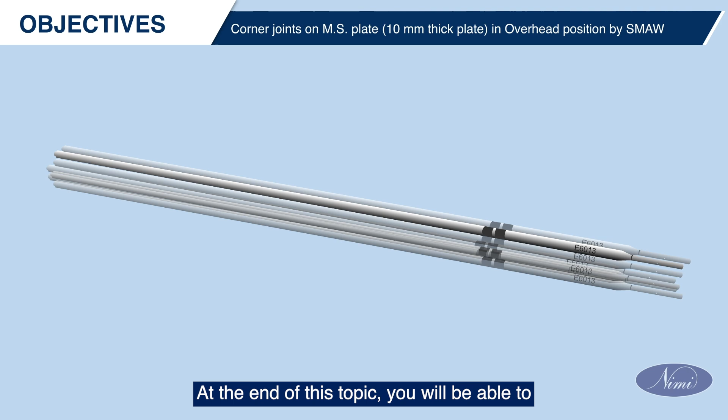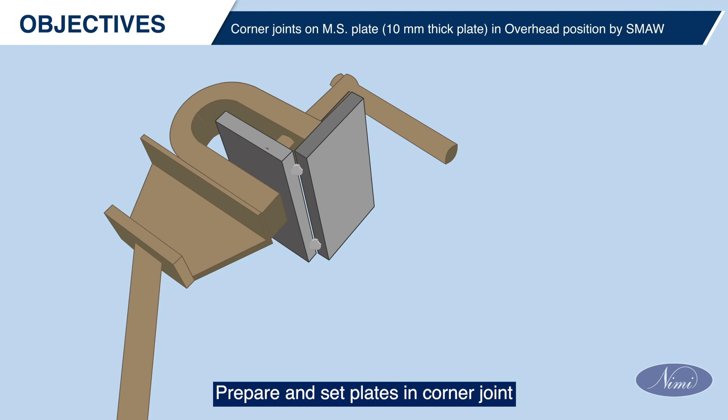Objectives: at the end of this topic, you will be able to select appropriate electrodes for tack welding and welding process, tack weld, prepare and set plates in corner joint in overhead position, and visually inspect the weldments.

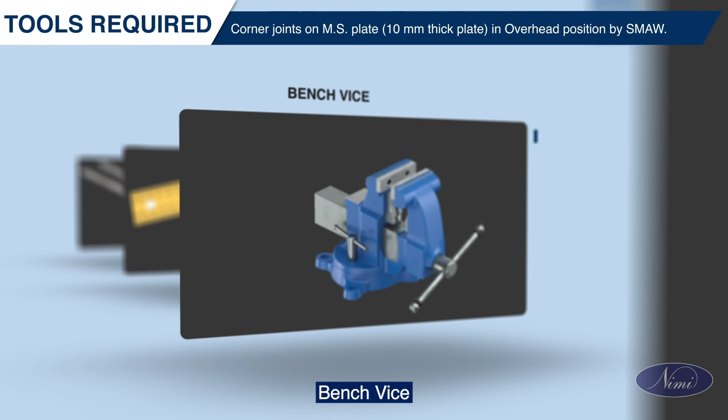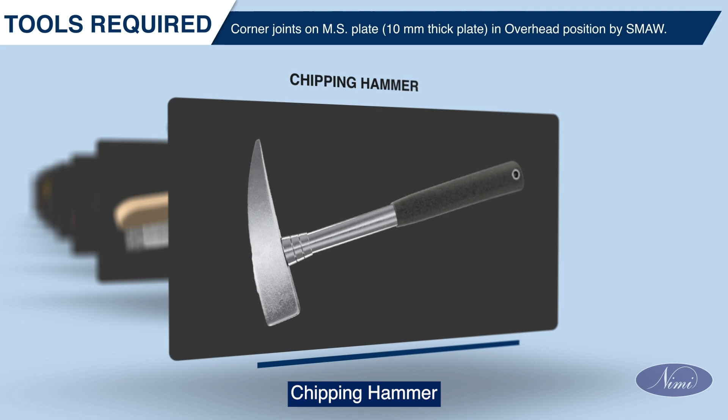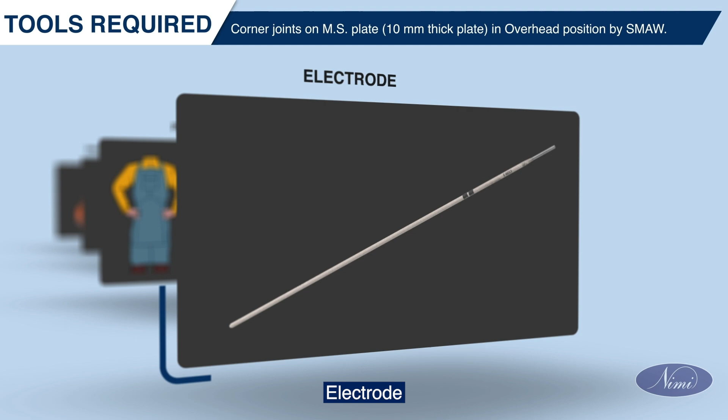Now let us look at the tools required for corner joint on a 10 mm thick MS plate in overhead position by SMAW process: steel rule, scriber, prick punch, ball peen hammer, flat file, bench vise, tri-square, tongs, chipping hammer, steel wire brush, electrode cable and earth cable, electrode holder, electrode, personal protective equipment, SMAW welding plant machine and their setup accessories, C-clamp.

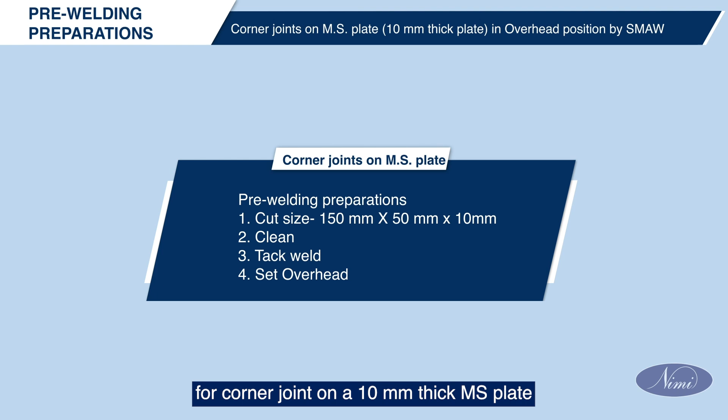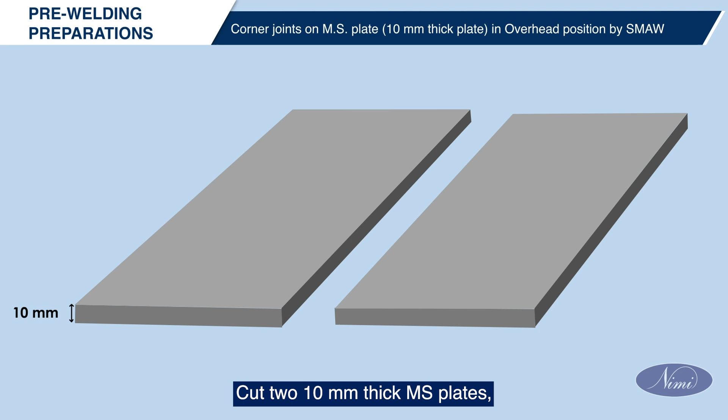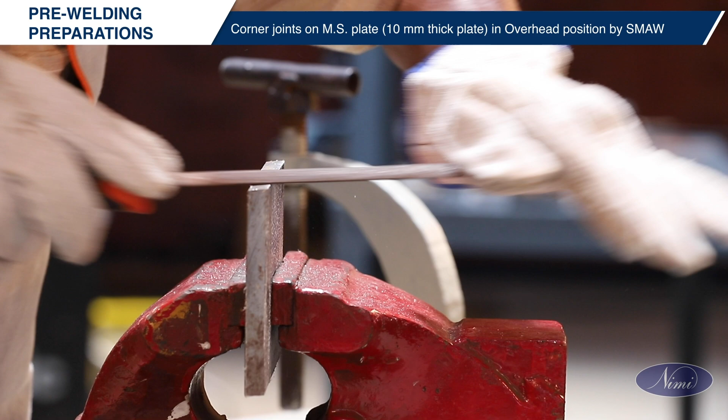Now let us look at the pre-welding preparations for corner joint on a 10 mm thick MS plate in overhead position by SMAW process. Use personal protective equipment for safety purposes. Cut two 10 mm thick MS plates, 150 mm length by 50 mm width flat. Clean the surface and edges of the flat to be welded. Set the sheets in the form of a corner joint on the welding table. Set the pieces as corner joint with 2.5 mm root gap.

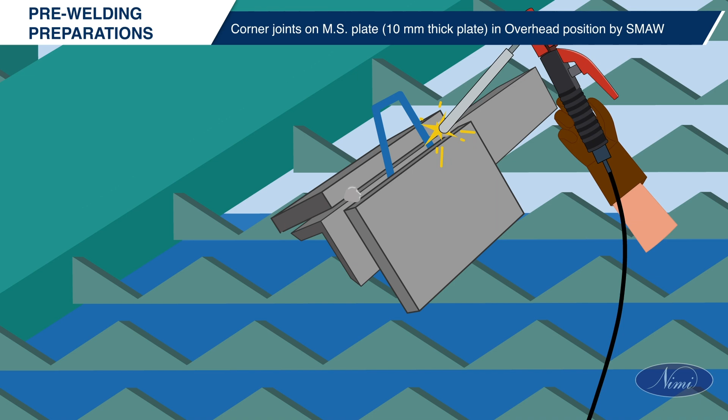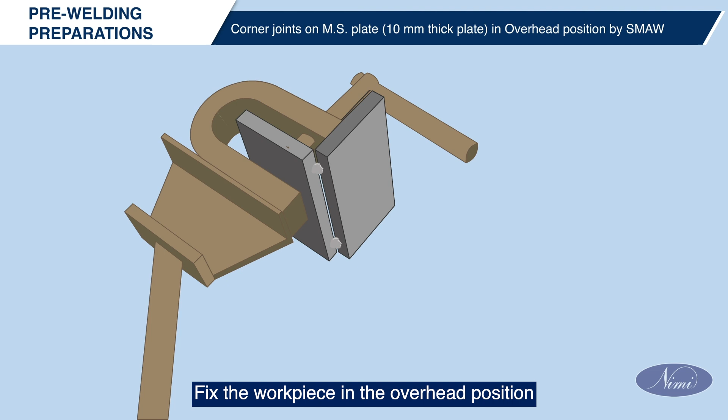Use a light welding cable to reduce the load on your arms. Fix the workpiece in the overhead position and adjust it to a suitable height.

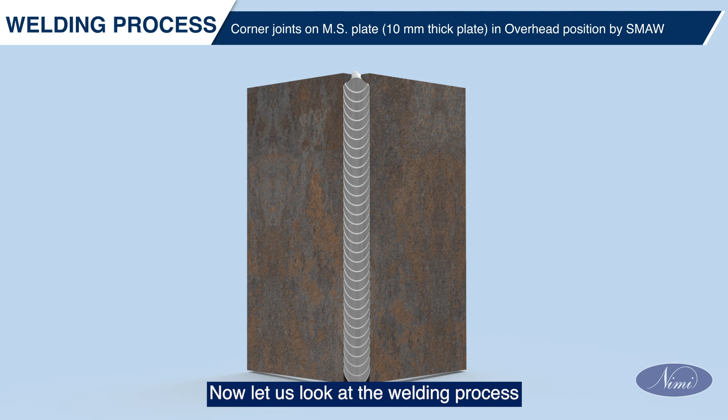We have seen the pre-welding preparations. Now let us look at the welding process of the corner joint on a 10 mm thick MS plate in overhead position by SMAW process.

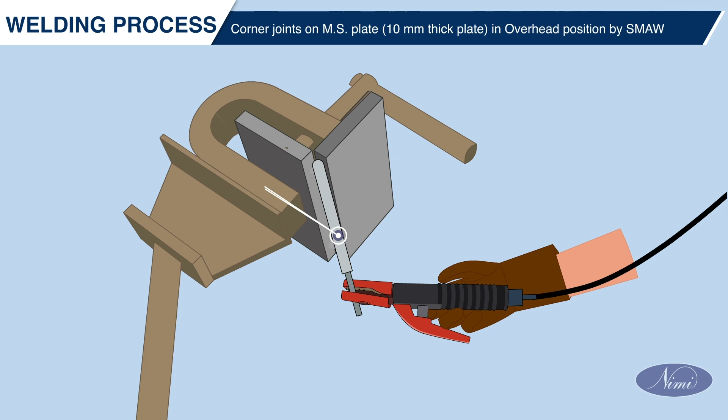Use a 3.15 mm MS electrode and set a current of 100 amps. Use a light welding cable to reduce the load on your arms. Fix the workpieces in the overhead position and adjust it to a suitable height.

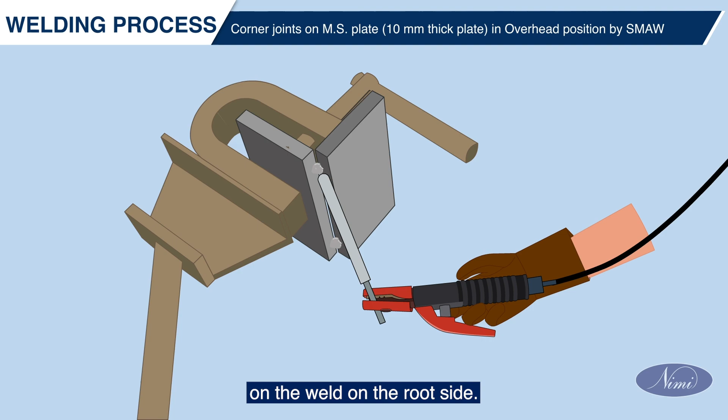The electrode should be kept as near as possible and square to the surface of the plate and to a small angle to the direction. Keep the electrode well up in the gap and control the keyhole to get a small reinforcement on the weld on the root side. Keep a short arc length. Control the slag and it must not drop into or flood the weld pool.

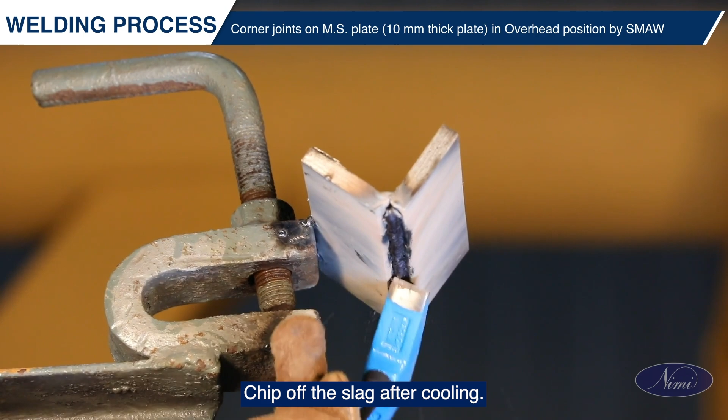Weld up to the end of the workpieces. Chip off the slag after cooling. Clean with a wire brush. And inspect the weld.

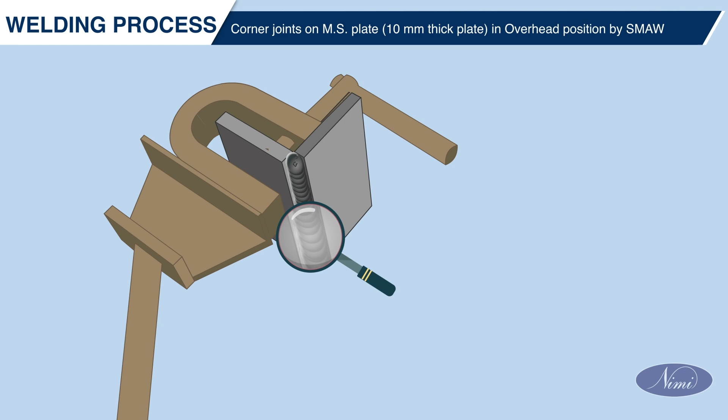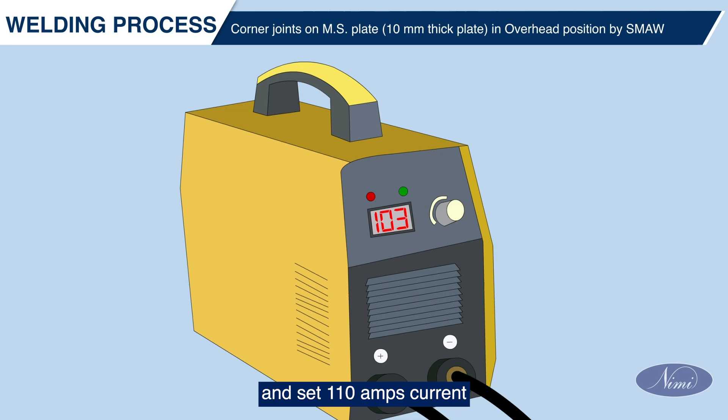Select a 3.15 electrode and set 110 amps current and use weaved beading technique.

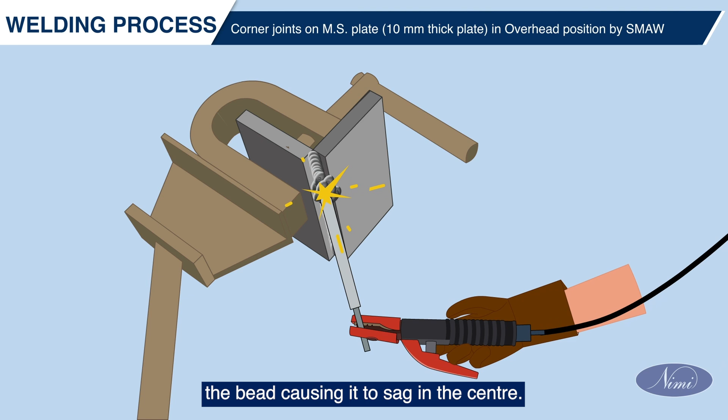The electrode should be moved across the face of the weld. Do not deposit too much metal in the center of the bead, causing it to sag in the center. The side-to-side movement should be kept within the required weld size. Stop a while at the sides of the weld to prevent undercut.

Chip off the slag. Clean using a wire brush. And inspect the weld.

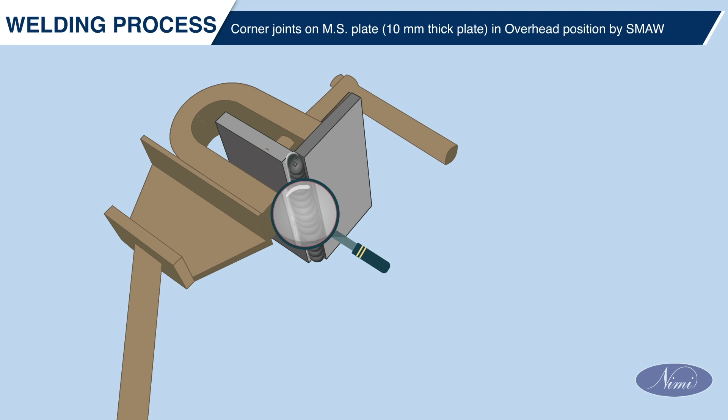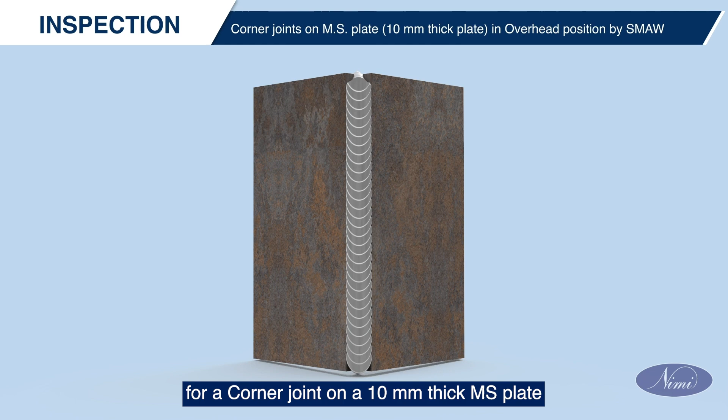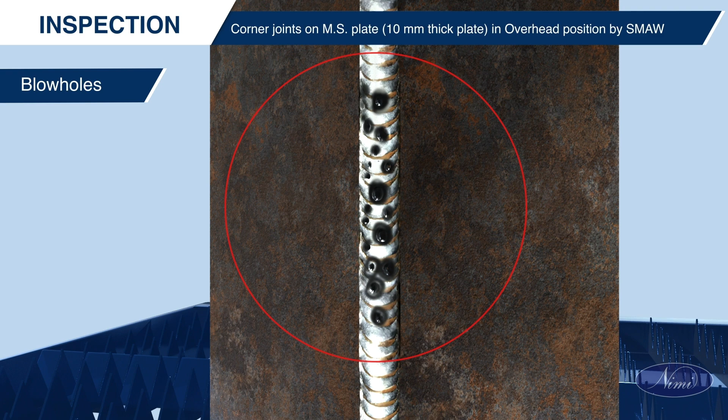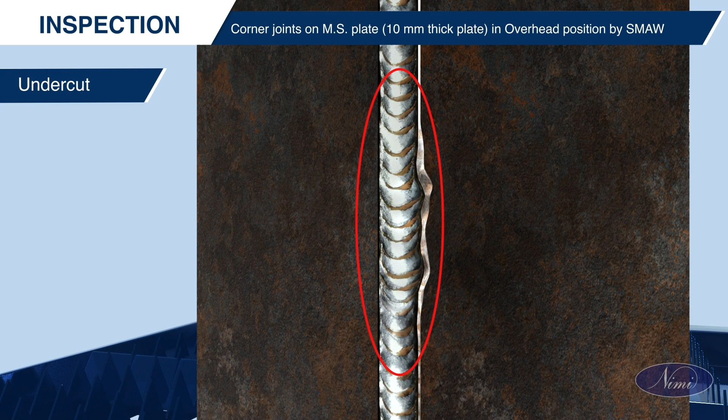Now, we will look at the important points to follow for a corner joint on a 10 mm thick MS plate in overhead position by SMAW process: wear safety apparels and welding goggles, maintain uniform weld size and shape of bead, avoid blow holes, uneven ripples, undercut, and spatters.